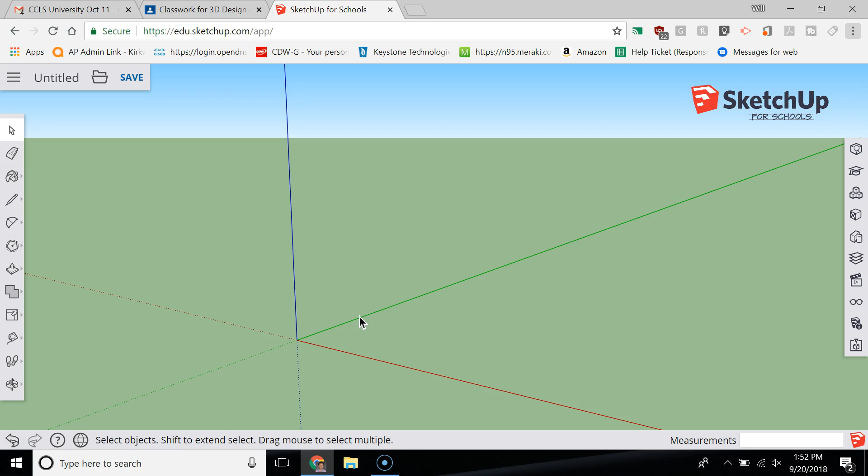So what we're going to do is use our polygon tool, found under the rectangle tool. If I click on rectangle, I'll choose the one right above 3D text, grab that polygon tool, and create a polygon. But now my polygon is going to be a little too big.

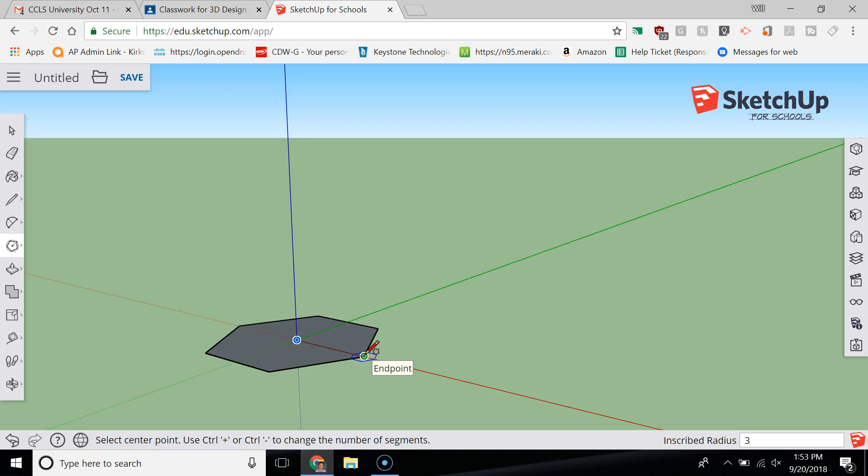Again, like the circle, this works on the radius. So if I want to make a cup that is only, let's make it 6 inches long instead of 8. This is a tough one to come up with, so I'm going to randomly assign the number 3, making it 3 inches. I type in 3, quotation mark, and hit enter, and now I've made a 6-inch diameter polygon, or as this calls it, inscribed radius 3 inches.

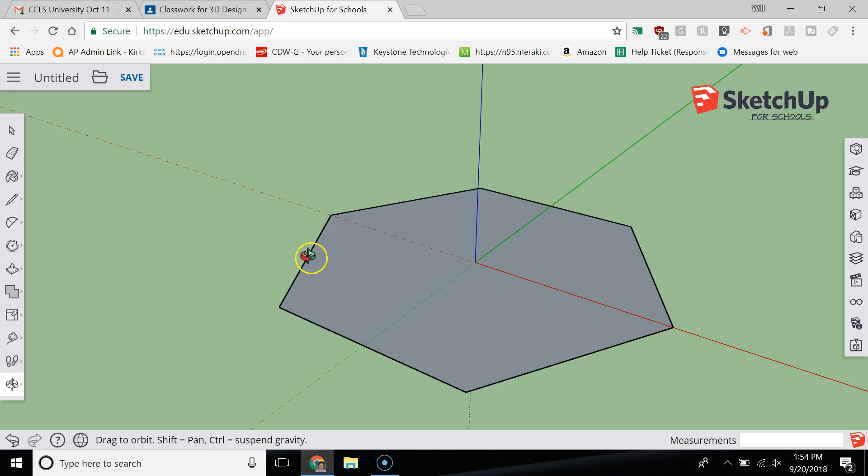Now I'm going to zoom extending my way into here, and you can see I have my polygon, but I need to create another polygon in here, and that's okay. So I'm setting it to 2, and let's make it 2 5/8. If yours is a different size, just type in 2 space 5/8, quotation mark, and hit enter. So 2 5/8, that's what mine looks like.

We need to first create a base. We need to make sure nothing's going to be falling through our pencil cup holder, because that would be a totally worthless pencil cup holder.

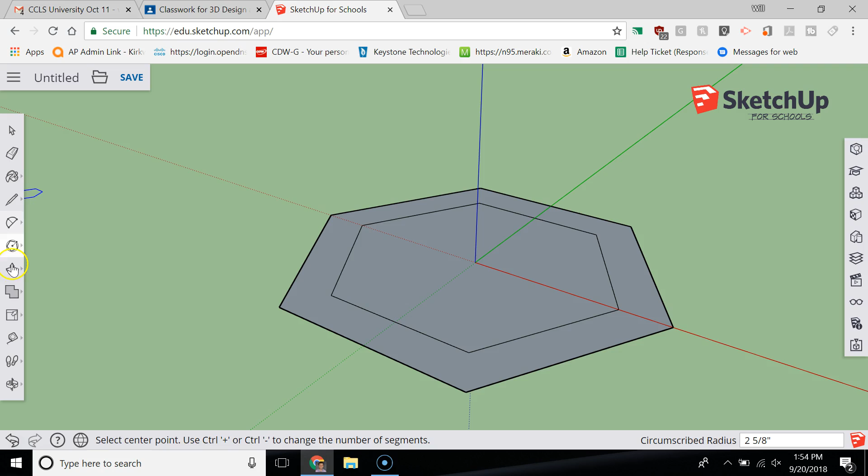So I'm going to make my base... let's reverse that, I have here, let's go 5/8 inches tall. Nothing too big. So I have this set up and ready to go, and I have this interior. Now this interior I'm going to do nothing with for the rest of the time, I just needed my base to all be the same.

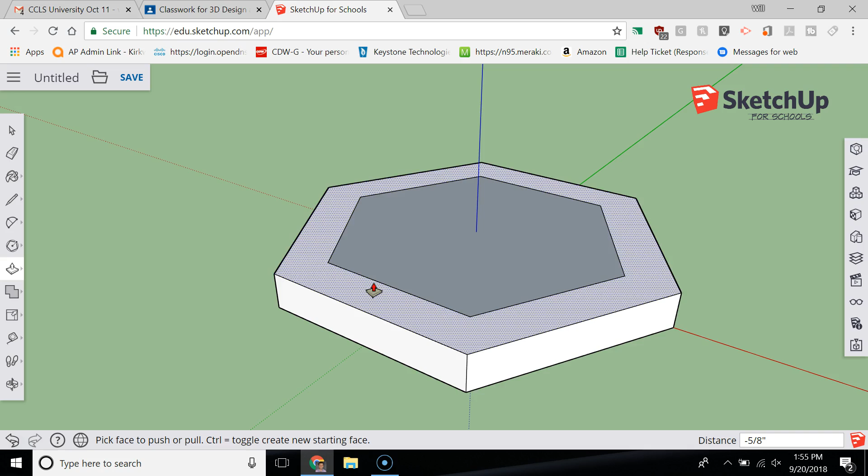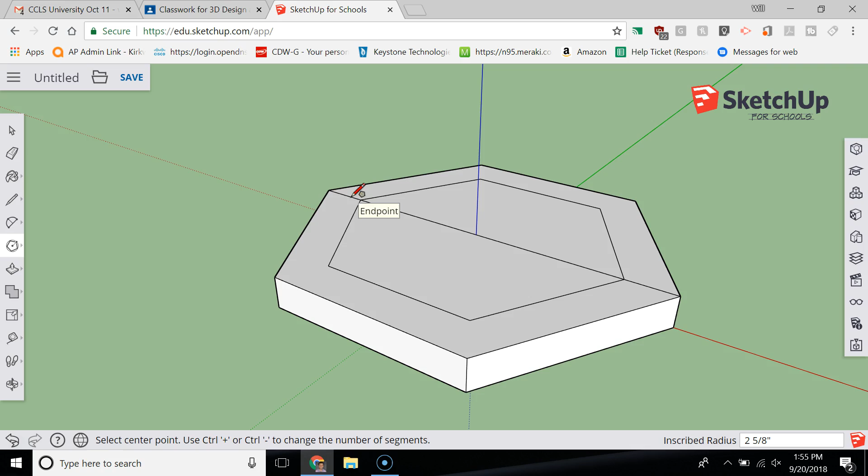Another option we could have done is gone up. Yeah, let's do that, going up here, this is just ensuring it's going to work correctly. I need to make a quick line here so I can work on the midpoint. If for any reason you can never access the midpoint of something, just go ahead and create a quick line so you can get what you want. So 2 space 5/8, quotation mark, enter, and then you delete that line when you're done.

So you can see here's mine, all ready to go, and I'm going to be push-pulling this guy up. Let's make him, I don't know, 5 inches tall. So we have it set to 5 inches.

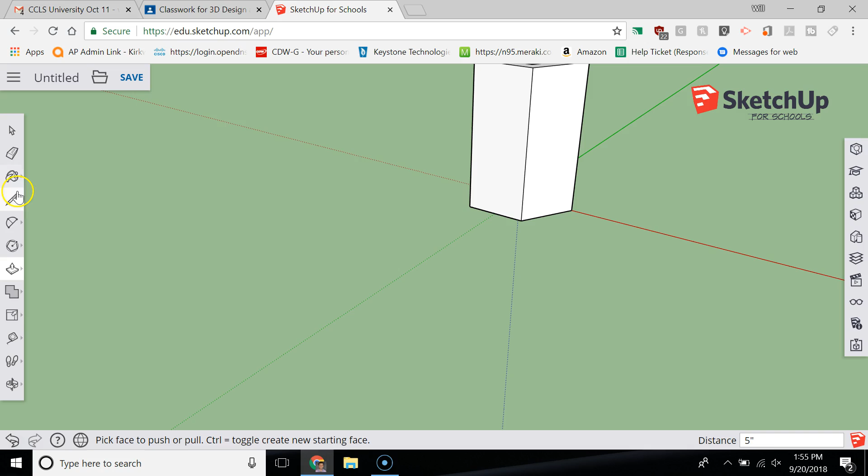Now I'm going to have a little fun here. On each side, and this is where it's going to take a little bit longer, but it's really easy once you get in the rhythm of it, what you have to do is create lines. We're going to use our ruler tool here, actually we could probably just get away with this tool here. We want to create them so it's like that, so we're not running into issues—we want our lines to be running straight.

You can see my SketchUp is lagging. What we're going to be doing is running lines on all of these from the interior, straight, straight. This would be straight here, straight here. There we go, so I can go here.

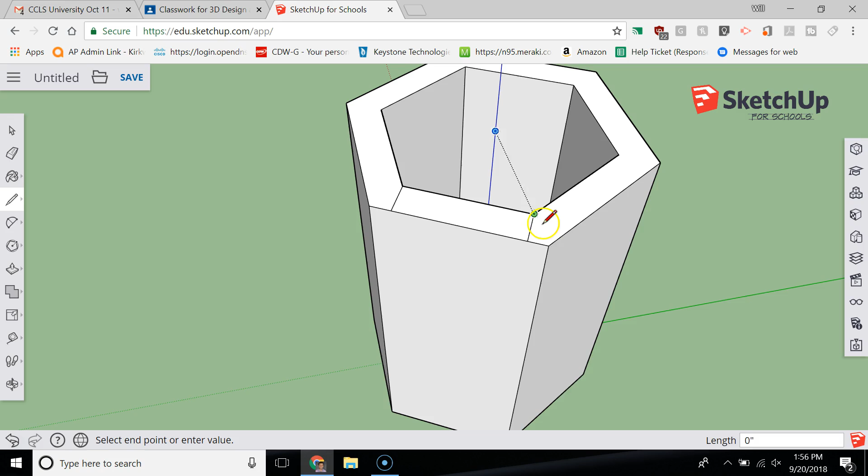So yeah, you might need to create something like that. I don't know, that's never a good thing to hear your teacher say, right?

So I'm changing the look of it. I want it to go from here to here. This one snaps to purple because it wasn't on a traditional axis, so that's green. I'm looking for the purple line like that, like that. This one should show up there. Good.

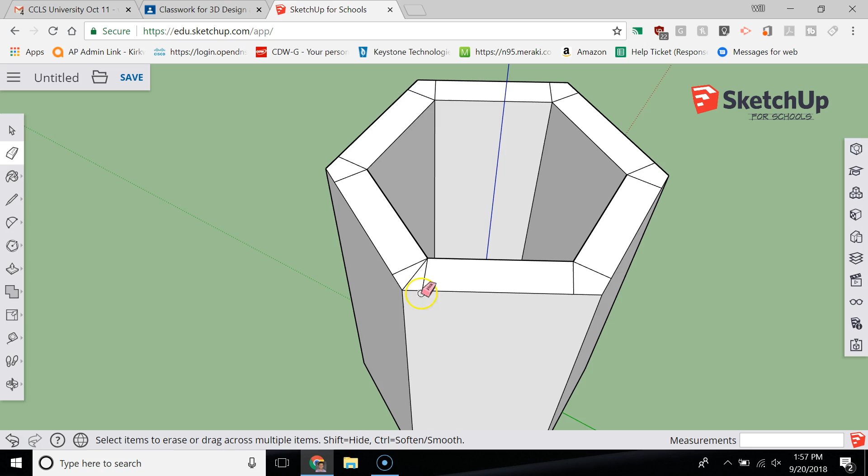There to there, there to there. I need these lines so I can create these guidelines for the squares I'm going to be making.

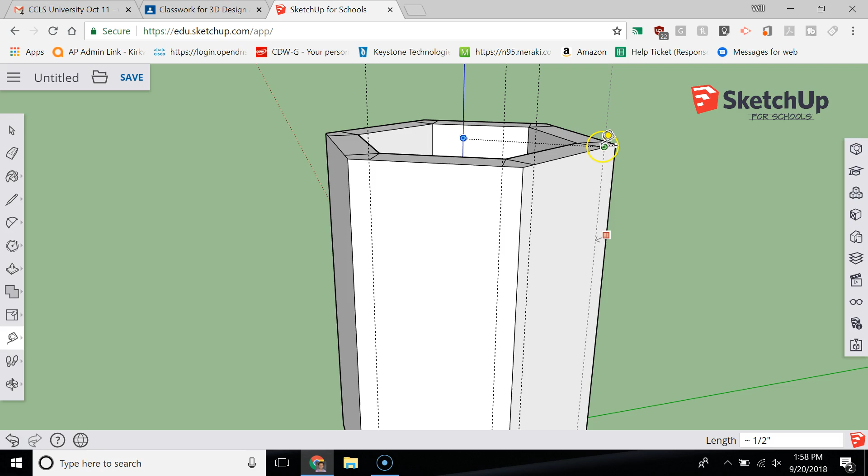The easiest way to make the guidelines is taking the tape measure tool, and then we are just measuring out to there, so we're measuring out to the lines that we just created. You'll do that all the way around the whole thing, measuring to those guidelines.

Then you're going to be taking your rectangle tool here, and you're going to create a rectangle. You can make it any size you want. I'm just leaving mine about that size. That'll look good. I double click it using the select tool.

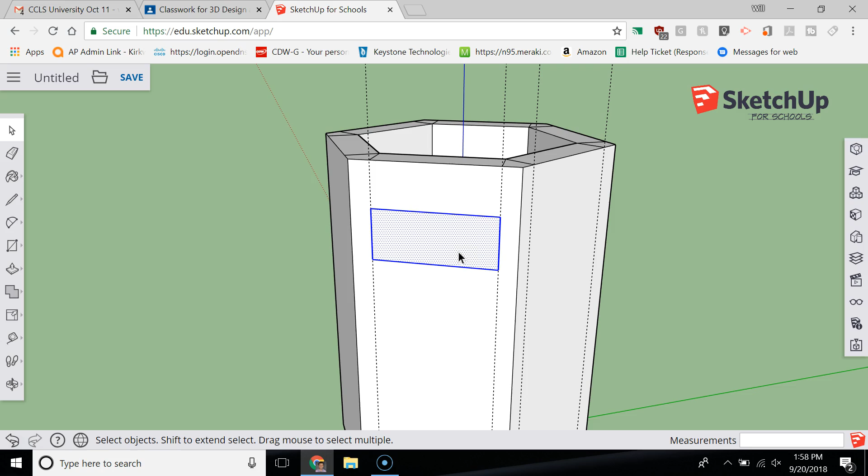I press Control C to copy, Control V to paste. Control C to copy, Control V. You can see I'm just going around. You can then just keep continuously pressing Control V to paste it, and you're just going around adding these where you want.

Once you have that done, you're going to take your push-pull tool. Take your select tool actually first, so make sure you're not selected on anything. Then we can push-pull.

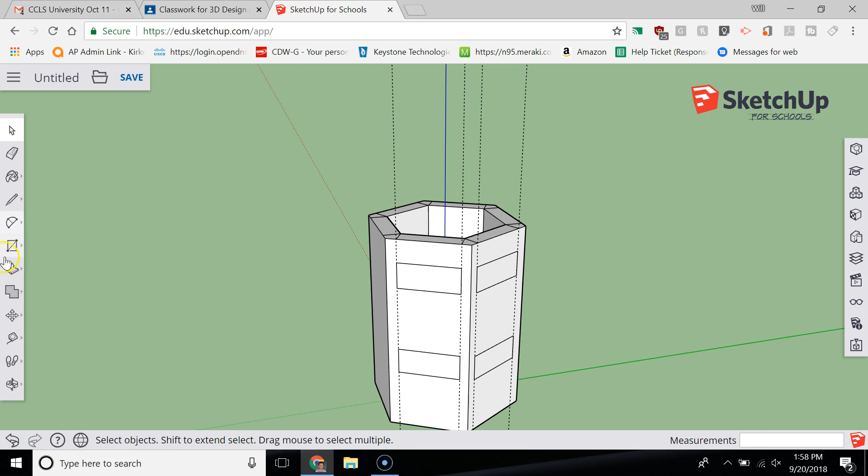I'm connecting it to this back area. If for whatever reason it doesn't delete, the very back wall, delete - make sure you look through, make sure it deletes correctly. Check the other side, and we're creating these cutouts in here.

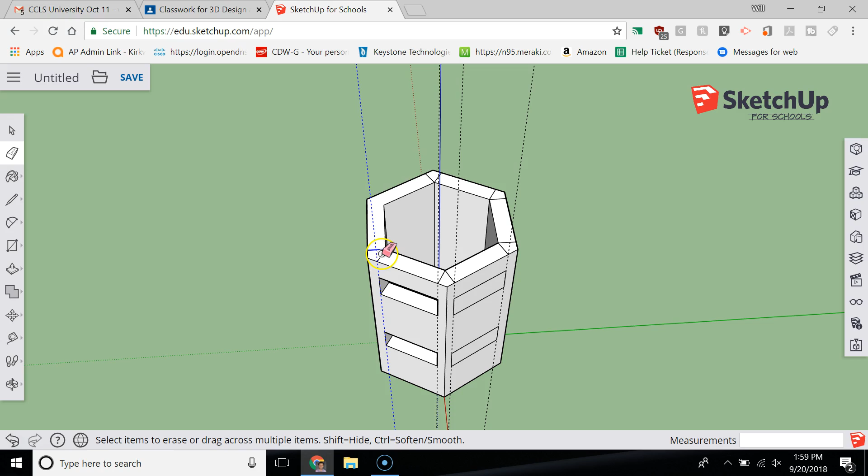Now, when I'm ready to go and I have all these cut out correctly, I'm going to use my eraser tool, and I'm going to get rid of these lines here on the top. You can get rid of the guidelines once you have everything that you need done with them.

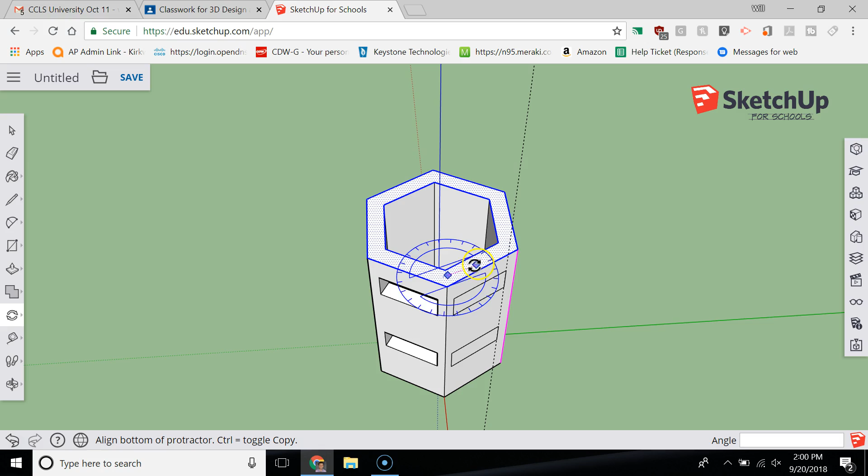Then I double click this top part here, and I click move. I want rotate, and I'm just going to click. Ah, that was not what I wanted. That did not work out how I thought it would. Shoot, it's not how it usually works.

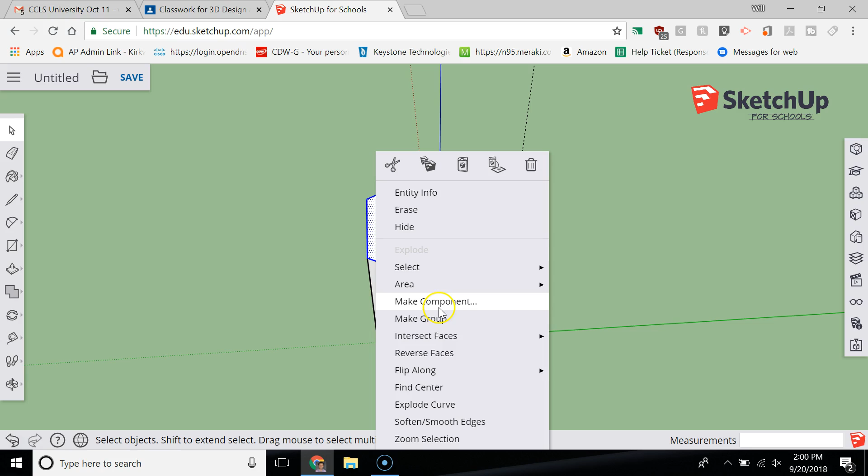Let's go here, double click it, right click, and maybe if I make group, and then I use my move tool, I should be able to get this like that. Oh, that didn't do it correctly. So we can keep it how it is if you want.

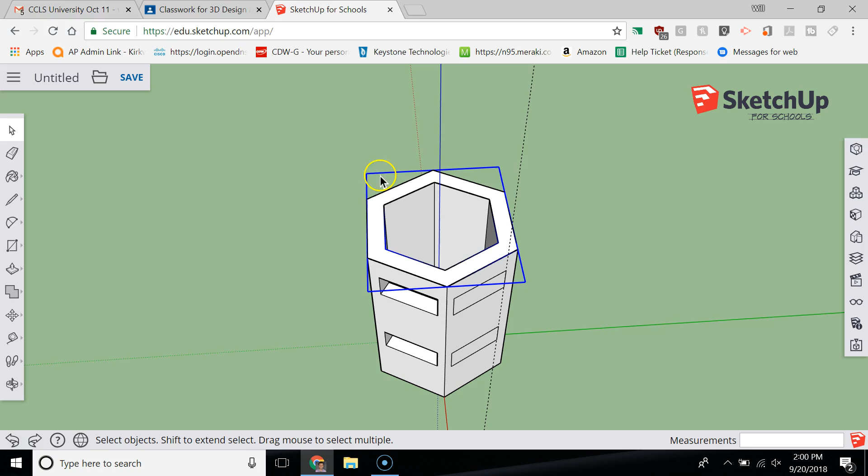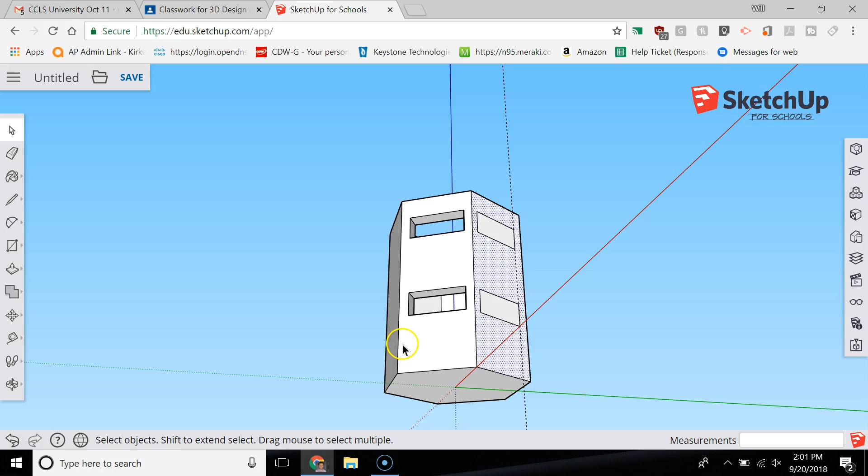There is a way where you can take it and then just kind of twist everything around it. It might be that you have to select the whole thing and then deselect the bottom part. Let's try that - I'm holding Control, I click there. Deselect the whole thing, hold Control. Nope, it is not wanting to work for me.

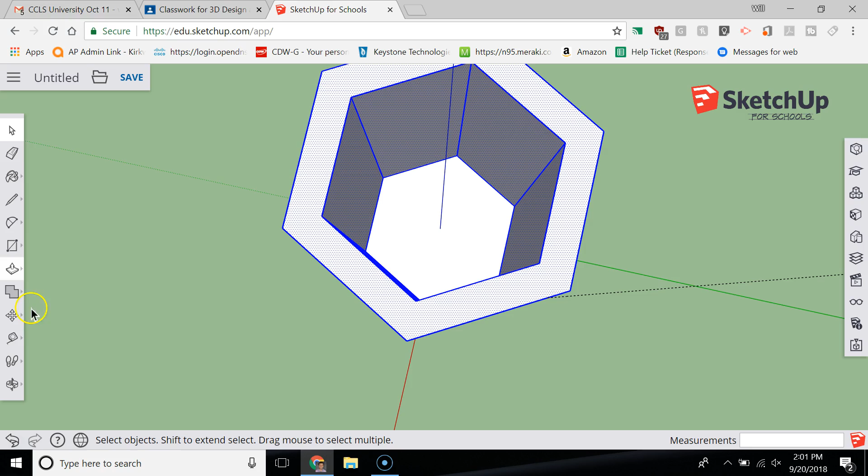That said, oh, there we go. You hold Shift and then you can deselect it correctly. Then you have to go on the inside and deselect this spot here. Then it should be - let's right click and make the whole thing a group.

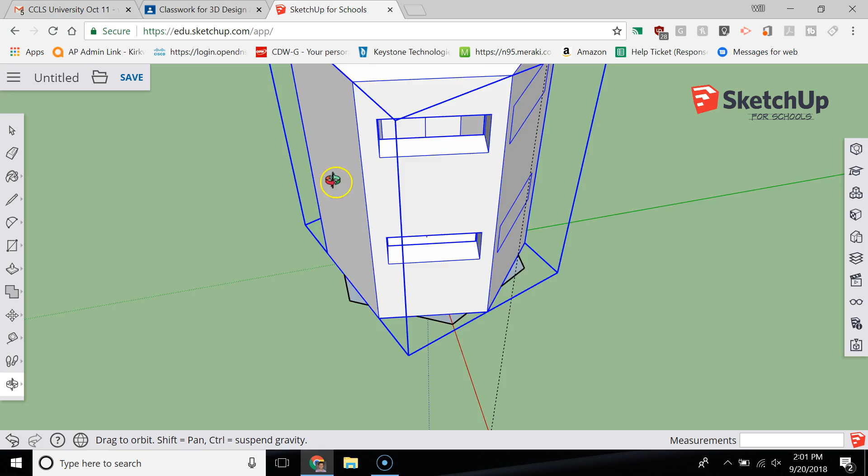And will it work if I rotate? This is me just kind of thinking out loud now. It did not - it didn't do what I wanted it to do, but you could have some fun with that. You could rotate it, you could then pull these guys up, so you have a whole different combination of stuff being created.

Again, have fun, make your own pencil cup holder design. Totally up to you what you want to do with it. I'm excited to see what you submit, or if you submit just this basic one here. Play around with rotating, see if you can get it - I couldn't get it to work. I'm not expecting you to get it to work, it's usually just how it goes.